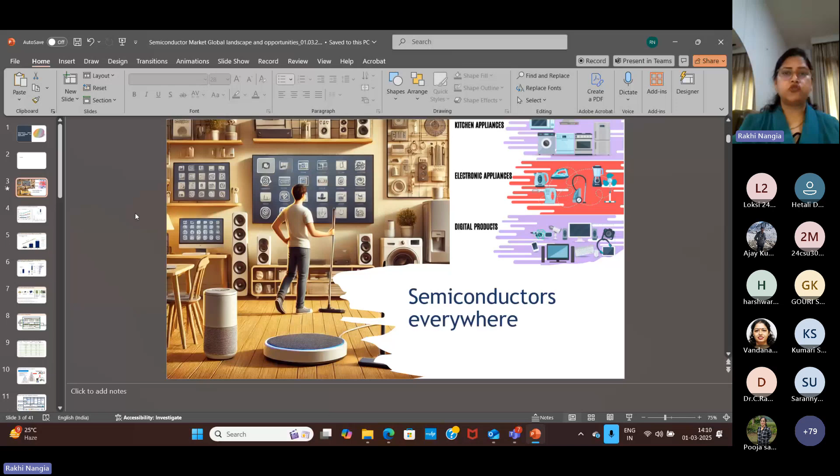In our day-to-day life, there are various appliances, consumer electronics, digital products, and high-tech devices, for example Alexa, consumer electronics like washing machines, smart TVs, smart fridges, and digital products like laptops, desktops, hearables, and wearables. So each and everything means hundreds of electronic devices around ourselves, and inside those consumer devices there are semiconductor chips. Can you imagine how many semiconductor chips we use on a daily basis? I would say in each and every home nowadays there are thousands of semiconductor chips residing, which every person is using, and maybe they are not aware how much electronics they are using, and inside those electronic devices it is nothing but semiconductor chips. That is creating the semiconductor market.

Because those semiconductor devices are going into electronic devices, the final product, that's how it is driving the electronics manufacturing in India.

There are mobile phones, IT hardware like laptop, desktop, tablets, and other devices, very smart devices used in offices and our professional life, various consumer electronic devices like TV, fridge, speakers, and more. Similarly, we are also using auto electronics like various automatic cars, and these things use thousands of semiconductor chips inside.

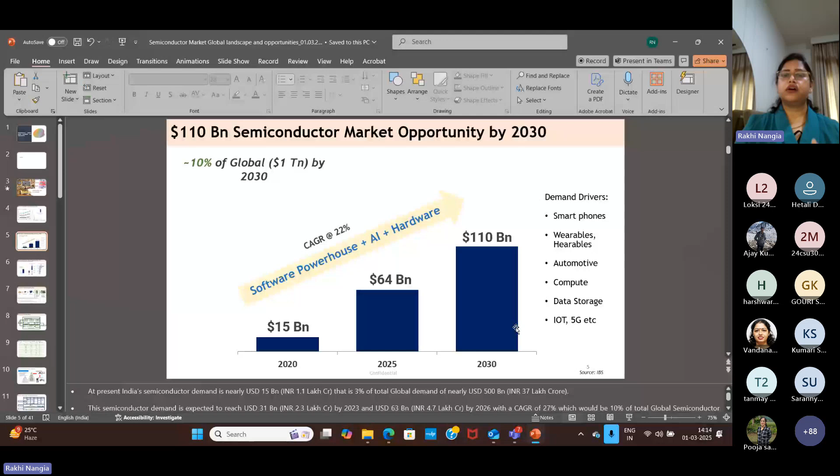As I just mentioned, various demand drivers are definitely electronics, smartphones, wearables, hearables, automotive, compute like AI, data storage, IoT. You can see various modern homes nowadays using a lot of Internet of Things. Every device is connected to the internet and becoming smart on a day-to-day basis. Similarly, 5G communication—each and everything is using semiconductor devices, and that is driving the electronics market.

This is again the bifurcation of the market. I want to show, out of those demand drivers I just mentioned, which are the major ones. If we relate with daily life, mobile phones, hearables, wearables, various IT gadgets like laptop, desktop, mobiles, and 5G networks—these are contributing most of the market.

You can see from this graph that in 2021, the total market was 27 billion dollars, and mobiles and wearables contributed 13.8 billion US dollars, nearly 40 to 50% of the total market. The trend will go on—in 2026, out of nearly 64 billion US dollars, 31.5 billion US dollars is going to be driven by mobiles and wearables, next by IT, then by telecom, and so on.

Inside mobiles and wearables, there are various types of components used in your mobile—there is a processor, memory, various small PCBs used to connect to power and various other connectors, various sensors, and cameras. So these are the market by component.

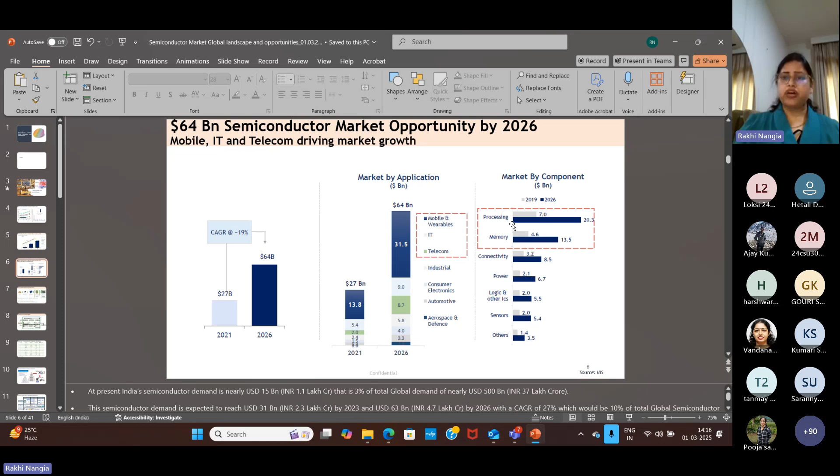Out of the total market, what would be the bifurcation component-wise? This would be not approximate, but the estimated bifurcation of the components market-wise.

So from this slide, I want to show where we are lying. If everyone can relate, as I got to know from Pooja ma'am, most of us are from industry or academia, so everyone can at least relate to these devices and how they are being manufactured.

When we start from simple sand, it is not a very simple process that only sand is going to produce the silicon ingot, but it is a very tedious process. Lots of high purity silica is needed to produce this silicon ingot.

Then this silicon ingot is diced into bare wafers, and these bare wafers are then fabricated in a semiconductor foundry. When this wafer is cut, for example a 200 millimeter or 300 millimeter wafer, it may have 1000 to 2000 chips on a single wafer, depending upon the complexity of the chip and the nanometer technology used.

Whether it is a 3 nanometer chip, a 7 nanometer chip, or maybe a 180 nanometer chip, depending upon the technology, a wafer of 200 to 300 millimeter size may have 1000 or more chips in a single wafer. Then each individual chip is cut from this wafer and packaged.

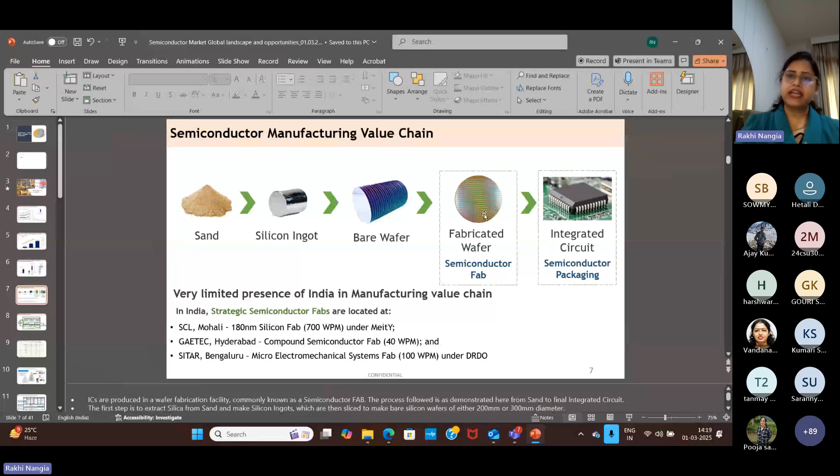But when the chip is being fabricated, the design has to come from somewhere. It is only the manufacturing process in a foundry, but earlier it has to be designed in a design phase. This design phase is usually done by companies we call fabless companies, where chip design is their major focus, then the foundry where fabrication is done, and then the OSAT unit, or assembly, testing, and packaging unit.

So this is the complete supply chain of semiconductor: first the chip will be designed, then the design will be fabricated on a semiconductor wafer, and then that wafer will be cut into various chips, and those chips will be packaged. These are the various allied sectors needed for design.

What do we need? Most of us would know that if I am doing a chip design on a laptop or desktop or in an industry, I need various electronic design automation tools and core IPs. There are various companies like Synopsys, Cadence, Mentor Graphics who design the EDA tools, and those EDA tools are used to design a semiconductor chip in this phase.

Then coming to the fabrication phase, what are the different things required? Number one is raw material - this includes wafers, chemicals and gases, and these are not common chemicals and gases, I will let you know in further slides. The most important thing, which is the most capital intensive, is the semiconductor manufacturing equipment.

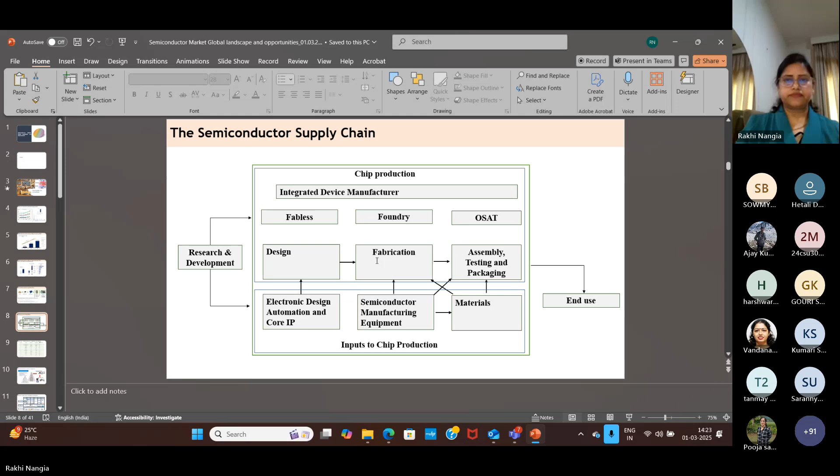But this business model is very important to understand, because, as I mentioned in my previous slide, some companies are only designing, while some are only manufacturing, while some are doing end-to-end process, meaning they are also designing, also manufacturing, also packaging. Those companies are called integrated device manufacturers, so called IDM.

So Intel, Samsung, SK Hynix, Micron, the companies marked IDM mean they are doing their end-to-end process. They are designing their chip, they are manufacturing their chip, and even packaging it, then using it in their own products as well. And some companies are only doing design.

For example, NVIDIA only designs the processor, the GPU processor. Similarly, other companies like MediaTek do the same. And AMD is producing GPU processors, etc. So these are the different models of the companies.

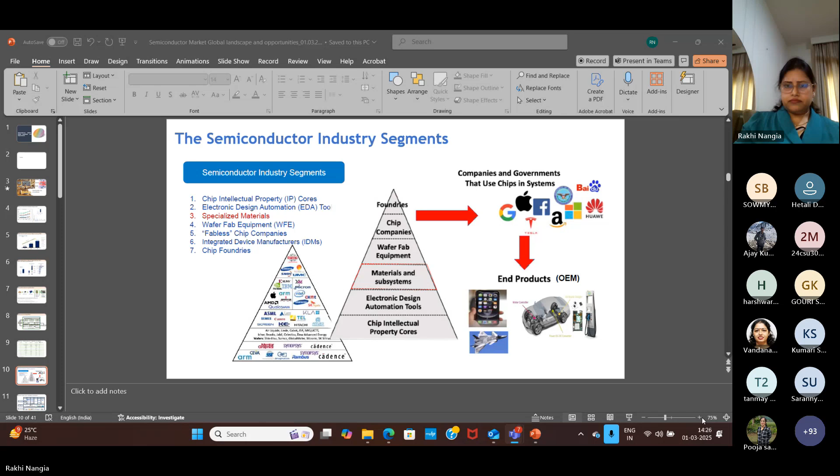So here are, I think, Pooja ma'am, can you see the screen in a proper way? Is the font size okay? Yeah, Rakhi ma'am, it's perfect. Okay, yes, thank you.

From this, I wanted to show that there are various companies present in these domains. A few are producing intellectual property, a few are developing electronic design automation tools, a few companies only work on materials. A few Japanese companies produce raw wafers. A few companies are designing the chips, a few are IDMs, and a few are foundries, meaning they only fabricate, not design, not package. But all of these companies are present globally.

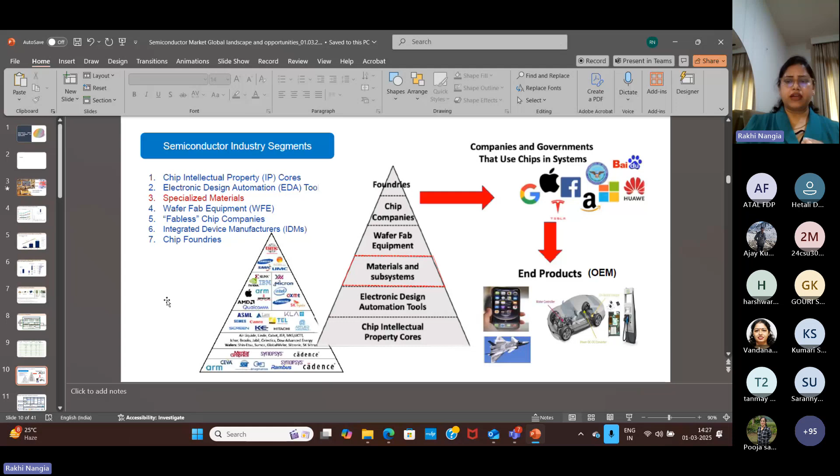There are 6 or 7 major geographies in this space. I will say the US is the major one, then Korea, having SK Hynix and Samsung, then Japan, which has a monopoly in producing wafers, then China, and similarly Malaysia. So there are 6 or 7 geographies majorly contributing to this ecosystem, and India is just entering into the space. So from this, I want to share where we are actually.

So this is the domestic value chain, as I was saying: design, equipment and tools, and manufacturing. So where does India stand in terms of design?

There are various chip design companies in India, but none of them are Indian. They are multinational companies using Indian workforce to develop and design their chips, but the intellectual property remains with the company headquarters only. For example, Intel has its presence in Bangalore, NVIDIA, AMD presence in Bangalore, and some other companies, for example NXP having their presence in Bangalore, in Noida, ST having their presence in various cities of India. We are designing only for these multinational companies, and the intellectual property belongs to that company only, it is not called Indian IP, right?

But the major advantage of working in this domain is that 20% of the chip designers are Indians. So we can say that India knows how to design the chip. In terms of workforce, in terms of knowledge of chip designing, India is contributing 20% of the global manpower. So 20% of the world's design engineers are Indians, whether they are sitting in India or in any other country.

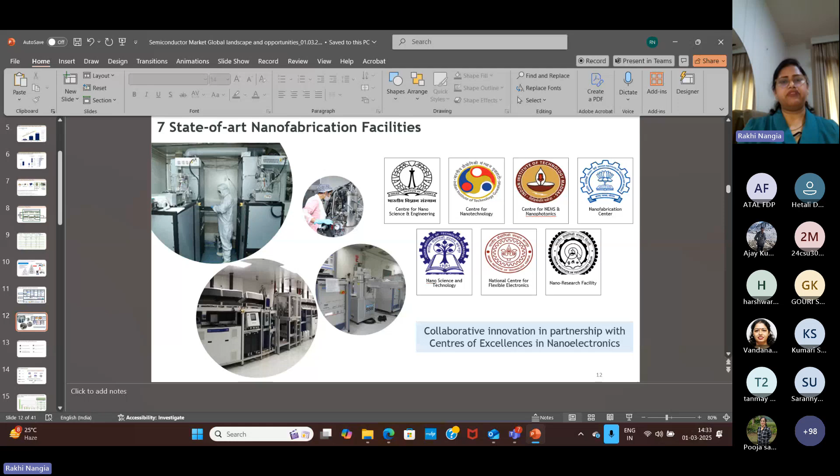And these facilities also have collaboration with their international counterparts, and various kinds of exchange programs - faculty exchange, student exchange, and facility sharing - those things are already going on in these facilities. So all this I am showing from the perspective of what is present in India as of now.

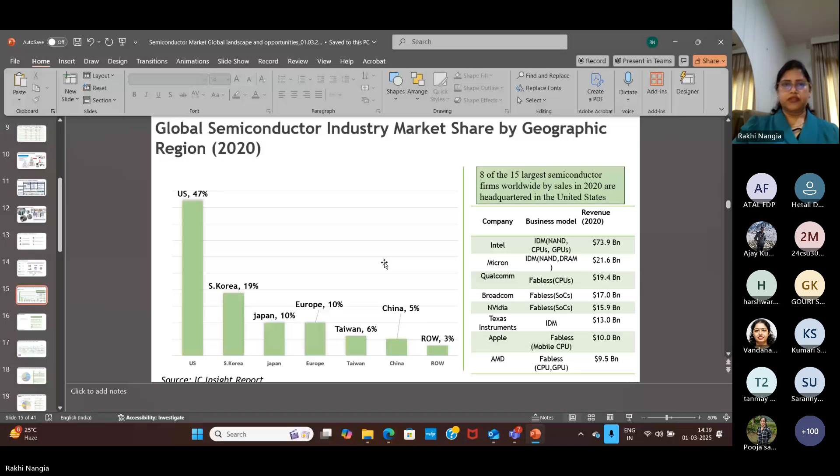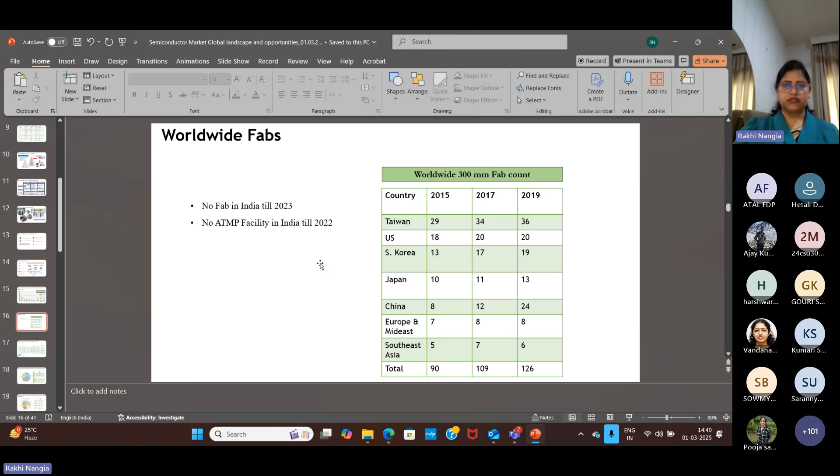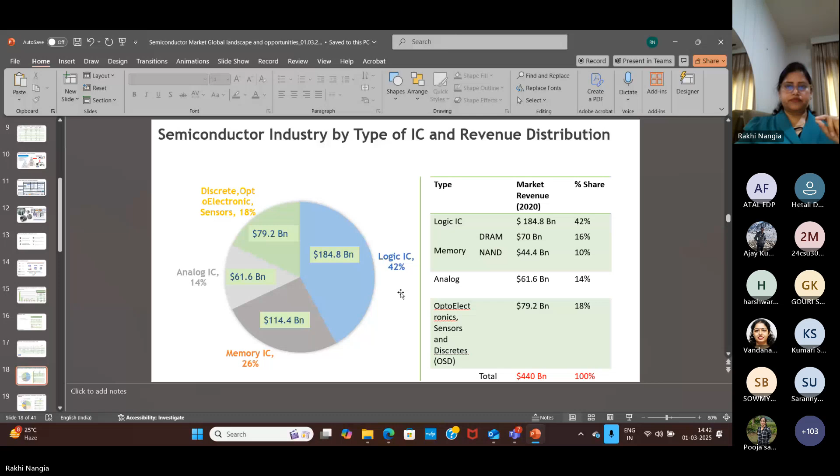I think I have already nearly covered these things, so I will skip this slide.

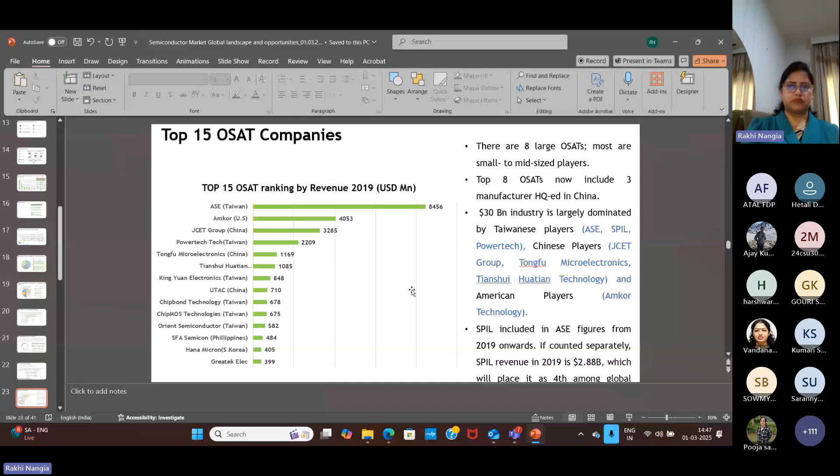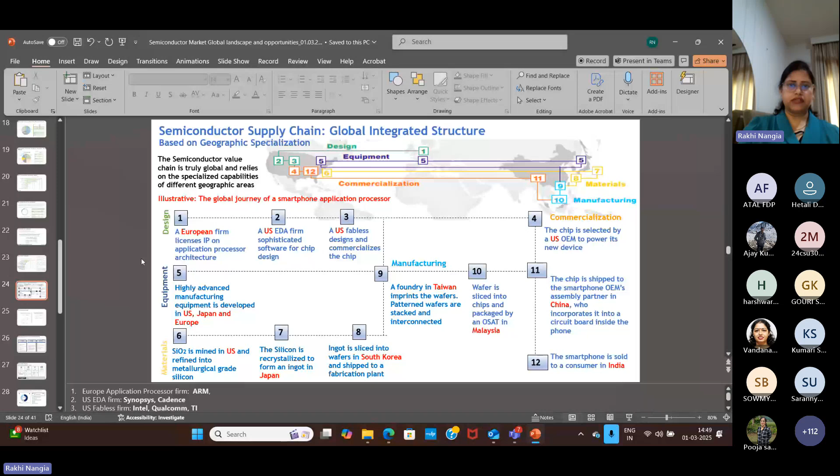Number one is capital intensity. Means to set up a fab, you need billions of US dollars. For example, if India is focusing on 28 nanometers, nearly 2 to 4 US billion is needed to set up that kind of fab. And if TSMC or Samsung, which are focusing on 3 to 5 nanometer technology, are opening up their new fab, for example TSMC has opened up their fab in the US.

Similarly, a US firm is opening its fab in Singapore. But for each individual fab, if they are working on 5 nanometer and below technology, to set up a single semiconductor foundry, more than 10 billion US dollars are required.

So one factor is this. Second is the knowledge, meaning technology know-how. Not everyone can have that technology know-how for this semiconductor space. And third is the workforce, meaning skilled manpower. So these three are the big factors needed to set up a semiconductor manufacturing unit.

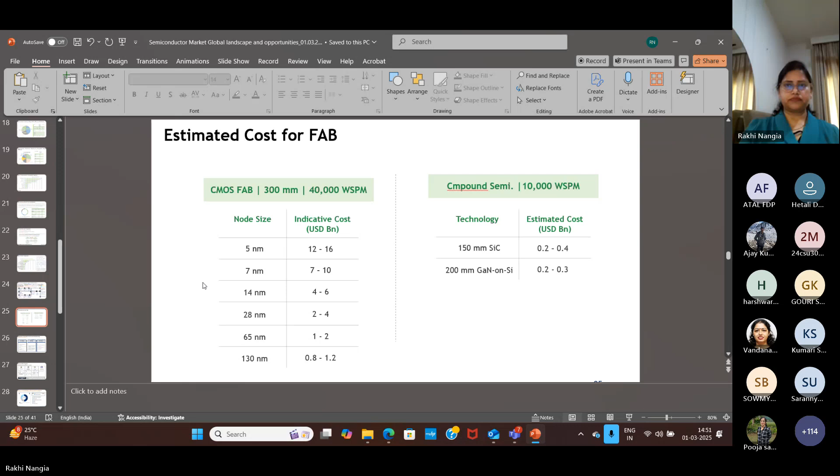Coming to the conclusion, we have seen from the last slides that yes, semiconductor is a very complex and technology intensive process. India has some presence in every space, in design, in manufacturing, in packaging, and globally we have also seen where equipment is, where raw materials are, where design spaces are, and so on. Now, to bridge this gap, the Government of India has come up with a policy to tap this gap and to set up a resilient semiconductor and display manufacturing ecosystem in India.

And they have come up with various policies, not only semiconductor policies but electronics manufacturing policies as well, to support this ecosystem. So I think most of us present here would know that the Government of India has come up with a 10 billion USD policy in December 2021, to set up a semiconductor and display manufacturing ecosystem in India.

So this policy is supporting setting up semiconductor fab, display fab, and compound semiconductor, for example gallium arsenide, gallium nitride, and silicon carbide. So these kinds of fabs, and ATMP packaging units.

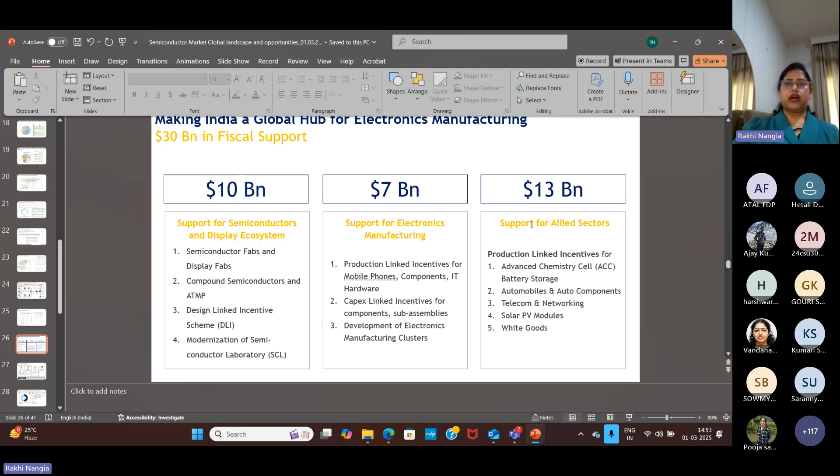And these other policies are various production linked incentive schemes to support allied sectors and to support electronics manufacturing.

So this is the complete Semicon India program. We usually call it the Semicon India program or semiconductor fab policy, either way we can call it. The total outlay approved by the Government of India is 10 billion US dollars. If we convert it into INR, that is 76 to 80,000 crore of rupees.

So for setting up semiconductor and display fab, how much fiscal support is given? Nearly 50% of the total project cost to set up a semiconductor fab will be given by the Government of India on a front or pari passu basis. Similarly, the Government of India also supports investors in terms of infrastructure support, which includes land, water, and power subsidy.

So not only the Government of India, but various state governments as well have come up with their own policies to support the investor companies, giving subsidy on land and water, because this kind of infrastructure is needed to set up a semiconductor fab.

Similarly, for the compound semiconductor and packaging policy, 50% of the capex is being supported, and these are the additional supports that are being given.

Similarly, for semiconductor design, this is the design-linked incentive scheme. This scheme is supporting 100 startups. The design infrastructure support, like EDA tool support, will be given, meaning 50% of the subsidy will be given by the Government of India. Similarly, on sales as well, we call it deployment-linked incentive. So 4 to 6% of the net sales, meaning incentive on sales, will also be given by the Government of India, along with design infrastructure support in terms of EDA tools.

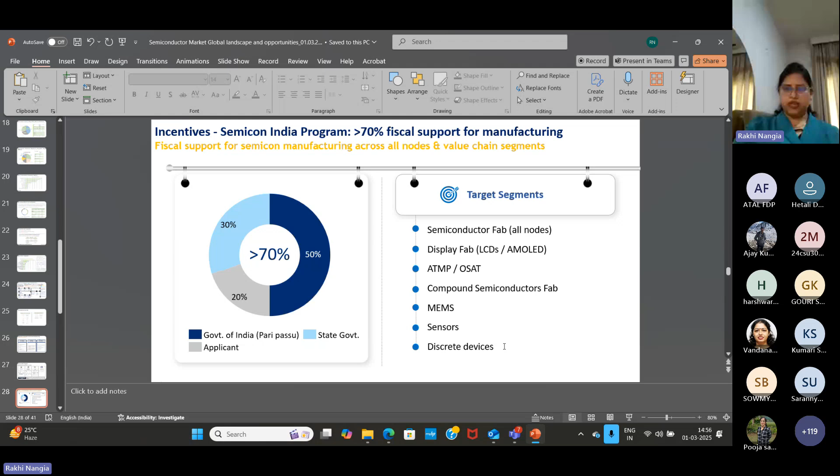Design-linked incentive scheme, I already mentioned. So these are the various target segments that are being covered. If any startup or design company working on integrated circuits, chipsets, system on chips, systems and IP cores, or semiconductor linked design, they would be supported by the Government of India in terms of product design, with 50% of the support given.

In terms of deployment, meaning if some company develops an IP and it is deployed somewhere, with some other company taking that IP and using it in its product, then on that sale, the Government of India will give 4 to 6% incentive and infrastructure support.

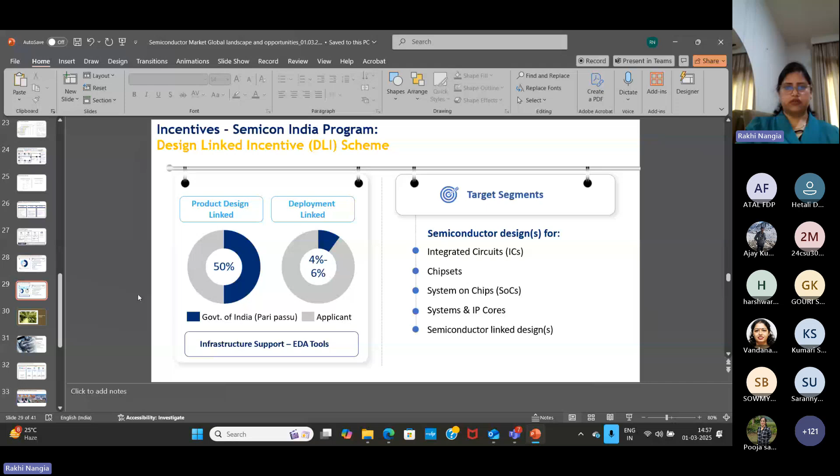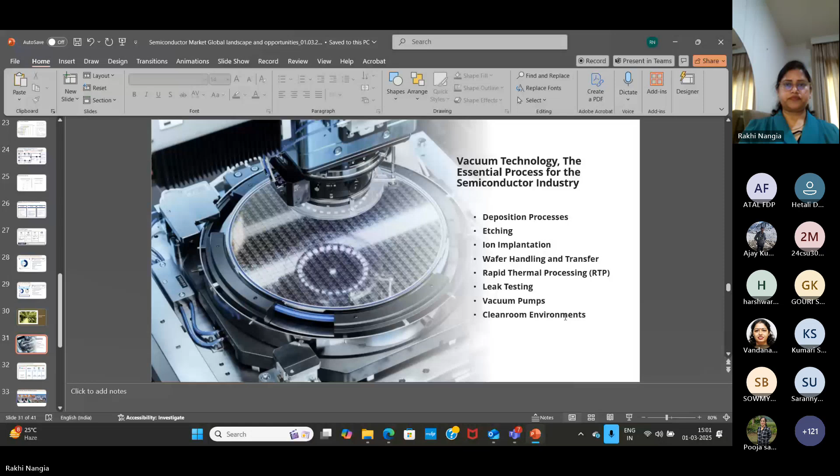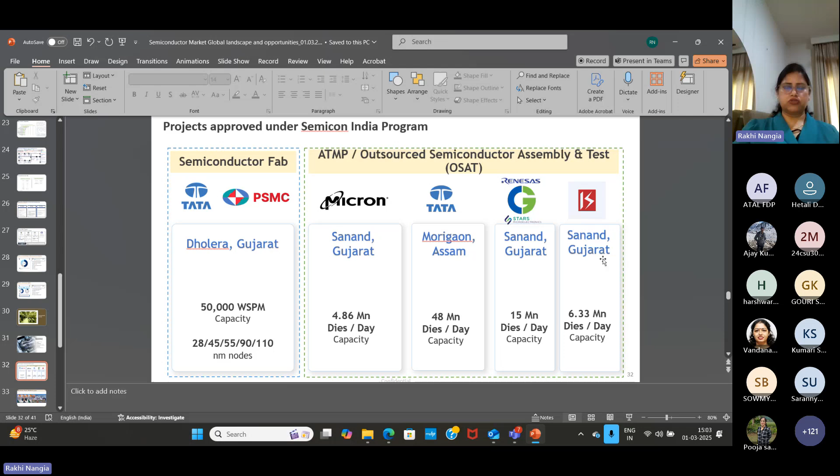Another is again by Tata—they are setting up their unit in Morigaon, Assam, and will produce 48 million dies per day capacity. Similarly, there is another company called CG Power, who have tied up with Renesas and Stars Microelectronics for technology, and they will produce 15 million dies per day. So these 4 are packaging units, and one is the semiconductor fab. The last one is Kaynes Technology, setting up their unit in Sanand, Gujarat.

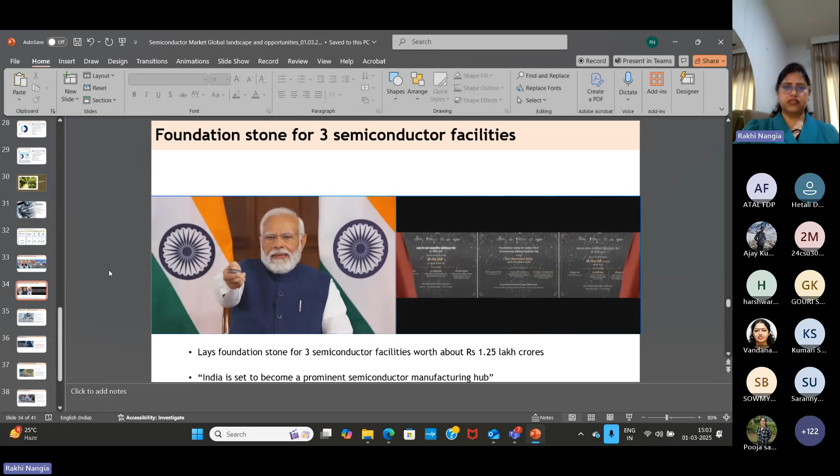So these are the pictures of when the Honorable PM broke the stone and launched these new 5 units—the foundation stone of 3 semiconductor facilities with lots of investment.

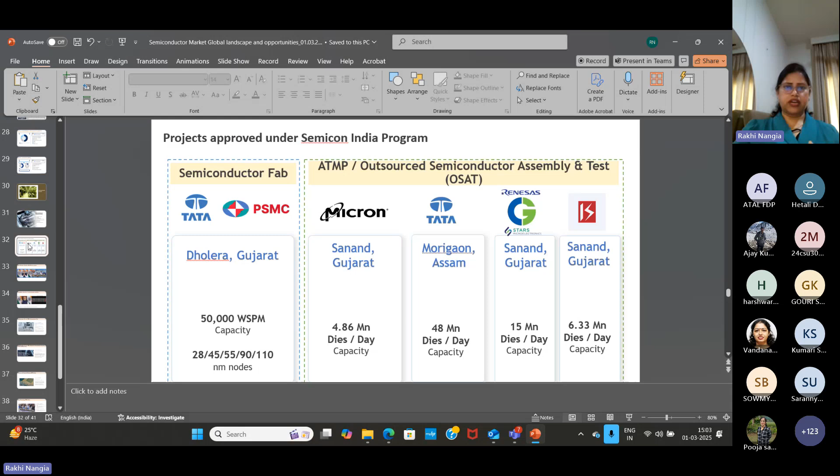So these are the details of these units, like Tata Electronics Private Limited. They are setting up in Dholera, Gujarat with this much capacity, approved in 2024. They are setting up a semiconductor fab facility with an investment of 91,000 crore, in collaboration and partnership with Powerchip Semiconductor Manufacturing Corporation, PSMC, Taiwan. They will produce nearly 50,000 wafer starts per month across various technology nodes, from 28 nanometer to 110 nanometer nodes—depending upon the type of chip, the technology node will vary. They are developing their facility in Dholera, a special investment region in Gujarat.

Another facility is in Morigaon, Assam. There's a strategic reason behind this choice of Assam instead of Gujarat, because various clusters are being driven for infrastructure development around the country.

There are various strategic reasons behind this. Tata is again setting up their facility, but this one would be a packaging facility, with an investment of nearly 27,000 crore.

Yes, and they will use their indigenous technology, meaning they have not tied up or partnered with anyone else for this. They will use their own technology to package these chips, using various packaging techniques like wire bond technique, flip chip technique, integrated system design, and system packaging technique. These are the various packaging technologies, though there are others as well.

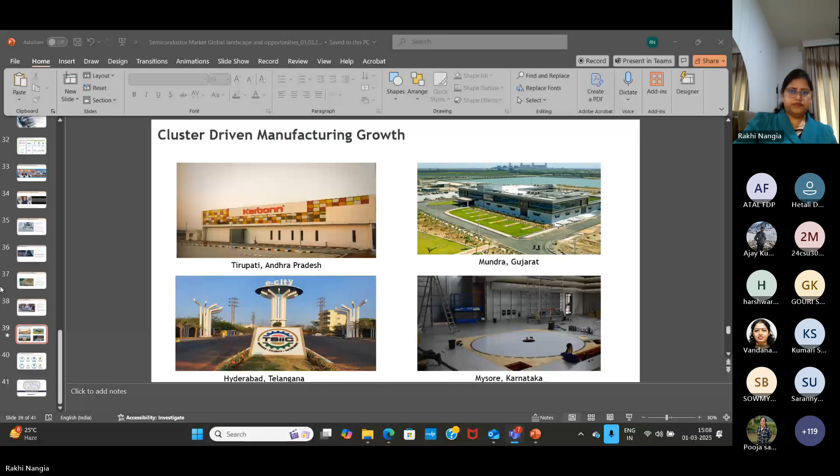So out of those four major factors, investment is being taken care of, infrastructure is being taken care of, and workforce development is being taken care of. But yes, there are lots of gaps, and here is the role of academia and research institutes.

I will end my session here. So, how can we go forward in this space?

Maybe if you are a student, definitely join an institute, university, or college offering semiconductor programs in terms of design, manufacturing or foundry, and semiconductor packaging. Or if you are a pass-out student, you can join various courses at different training institutes. There are lots of programs going on in India, and I know various institutes offering exactly the same program that the industry needs for manpower.

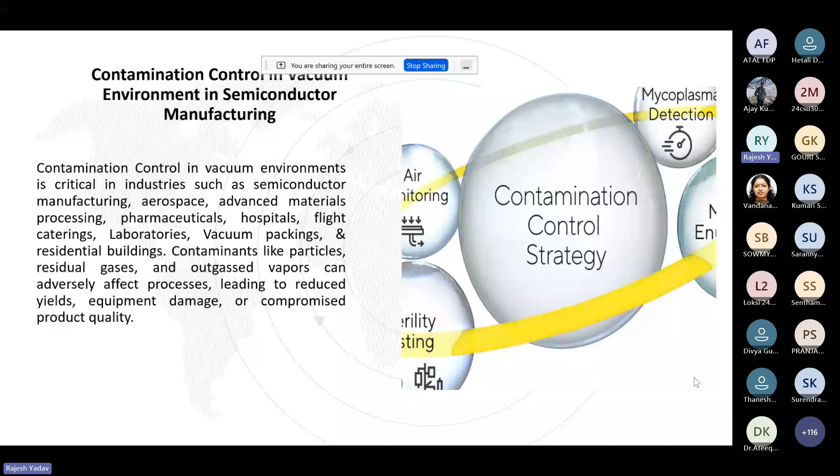The sources of contamination basically are the particulate matters in the vacuum environment, molecular contamination, process generated contaminants, operator induced contaminants, the pumping system, human factors responsible for contamination in vacuum environment, and environmental dust. We'll discuss them one by one in detail.

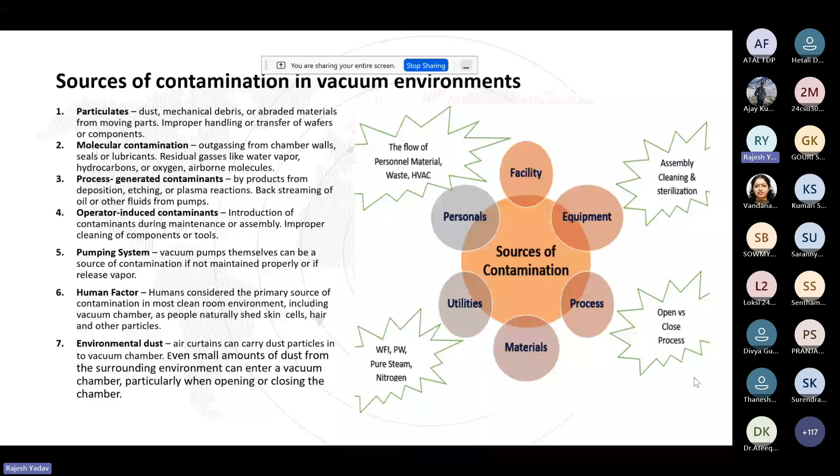The source of contamination is basically human and process both. The particulate matters - surfaces of semiconductors are particularly vulnerable to contamination like dust, oil, mechanical debris, or abraded material from moving parts. This accumulation on the surface can create barriers or insulating layers that interfere with the electrical circuit. Also improper handling or transfer of wafers or components.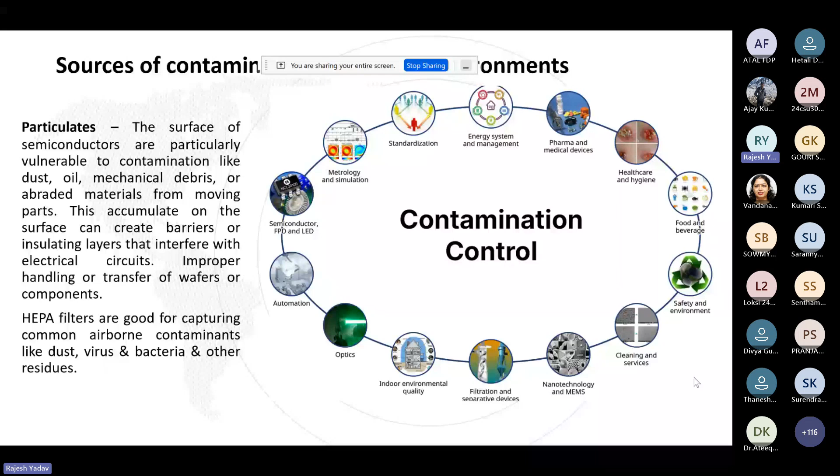Molecular contamination is basically airborne - outgassing from chamber walls, seals, and lubricants. Residual gases like water vapor, hydrocarbons, oxygen, and airborne molecules, often called AMCs, which can negatively affect the quality of manufactured wafers by introducing defects during vacuum-based processing steps, even at extremely low concentration, due to their potential to react with the wafer surface and disrupt the desired material properties.

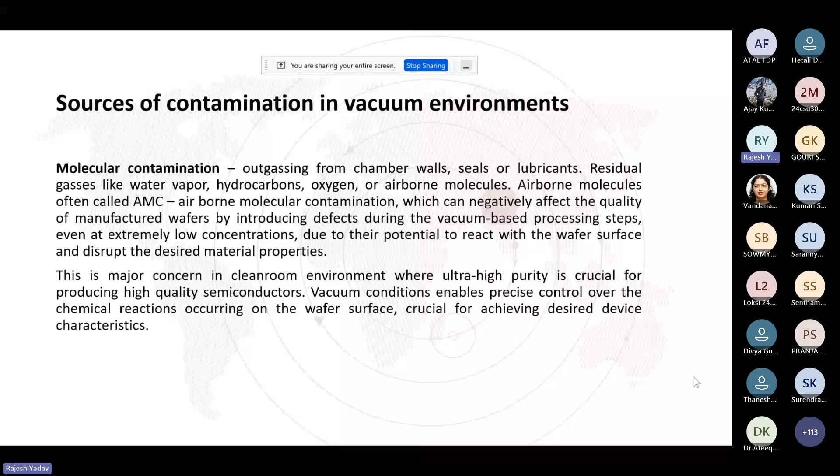This is a major concern in the clean room environment where ultra-high purity is crucial for producing high-quality semiconductors. Vacuum conditions enable precise control over the chemical reactions occurring on the wafer surface, crucial for achieving desired device characteristics.

Sources of the contamination in vacuum environment - molecular contamination key points include impact on quality, sources of airborne molecular contamination like operators, chemicals used in the process, equipment outgassing, and surrounding environments. Common airborne molecular contamination types are ammonia, water vapor, organic compounds, and various other reactive molecules.

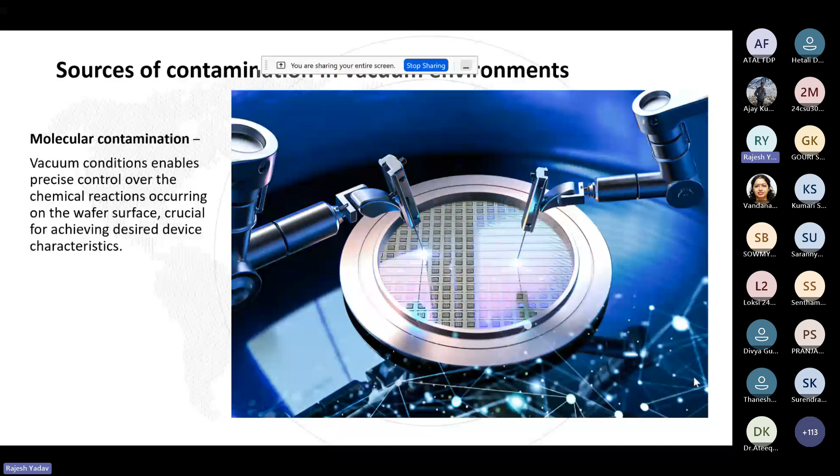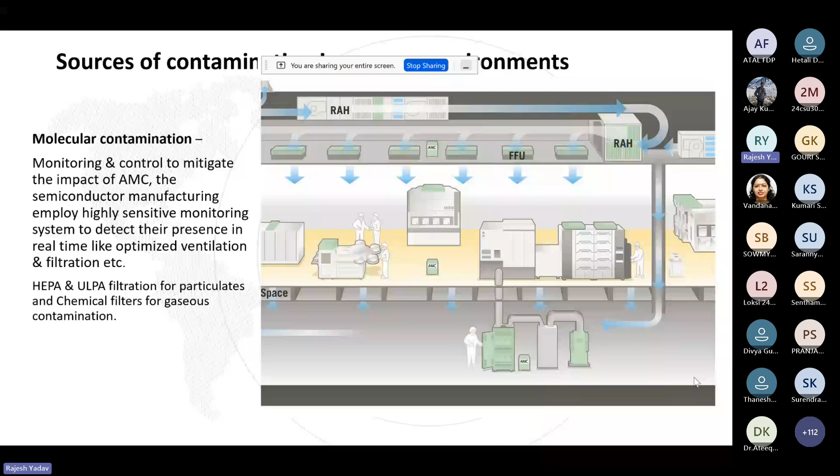Vacuum conditions enable precise control over the chemical reactions occurring on the wafer surface, crucial for achieving desired device characteristics. This is a sample of how air circulates in a clean room - the return air as well as the conditioned air, because air change is required to maintain healthy indoor air quality. Return air mixes with conditioned air, and fresh air also mixes at the plenum chamber. This FFU is the fan filter unit, which I will discuss in upcoming slides in detail.

This is a sample where outside air is treated first before mixing into the clean room with the clean room air. Vacuum conditions enable precise control over chemical reactions occurring on the wafer surface, crucial for achieving desired device characteristics. Filtration basically has two steps - HEPA filtration and ULPA filtration - the high efficiency particulate air filter and the ultra low penetrating air filter.

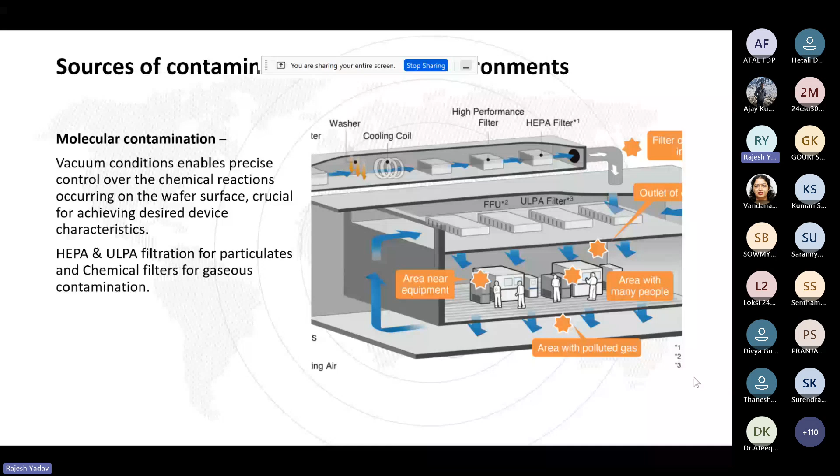The vacuum system utilizes high performance pumps to create a low pressure environment which draws air and contaminants through the filtration system. The HEPA and ULPA filters remove even submicron particles. The chemical filters are designed to absorb and remove specific chemical vapors and gases, often using activated carbon or other specialized media depending upon the chemical present in the process.

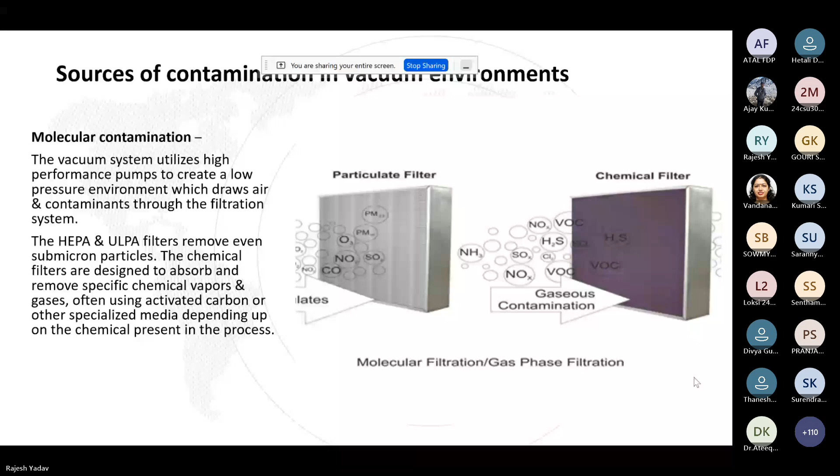This is in detail how the HEPA filter, the ULPA filter, and the chemical filtration remove all the microorganisms from the clean room air.

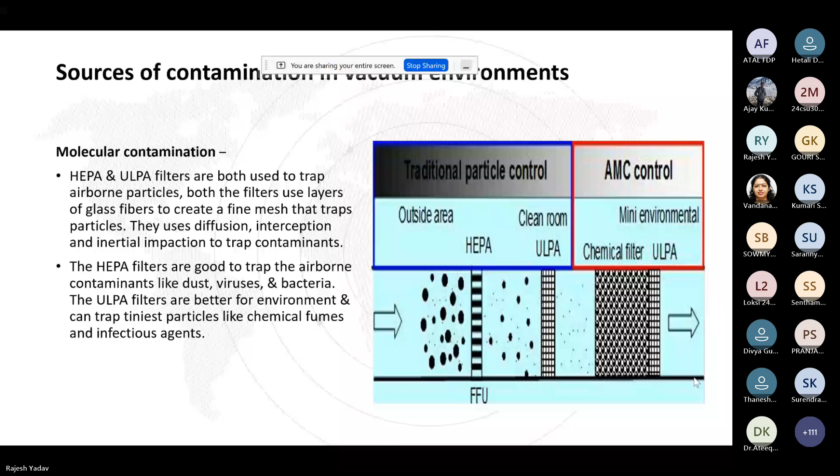This figure is in detail. The ambient air is introduced into the clean room after pre-treatment. There is a pre-filtration, there is an air washer. The air washer absorbs the particulate matters, and then the air goes to the cooling coil. The cooling coil removes the water vapors, which is below the dew point. Then there's a multiple stage high performance filtration system, which mixes with the conditioned return air, the ULPA filtration system, and that's how it maintains the quality in the clean room.

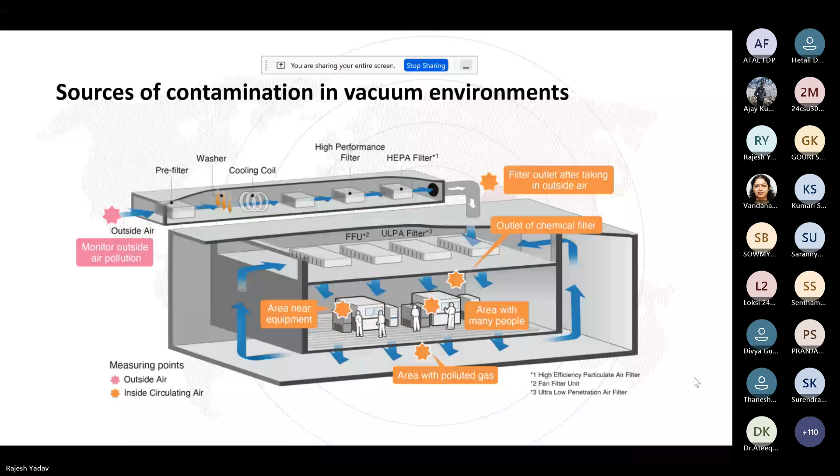The sources of contamination: process generated contaminants, the byproduct of deposition, etching, or plasma reactions, and back streaming of oil and other fluids from pumps. Semiconductors are extremely sensitive to even minute amounts of contaminants, which affect the performance of the device.

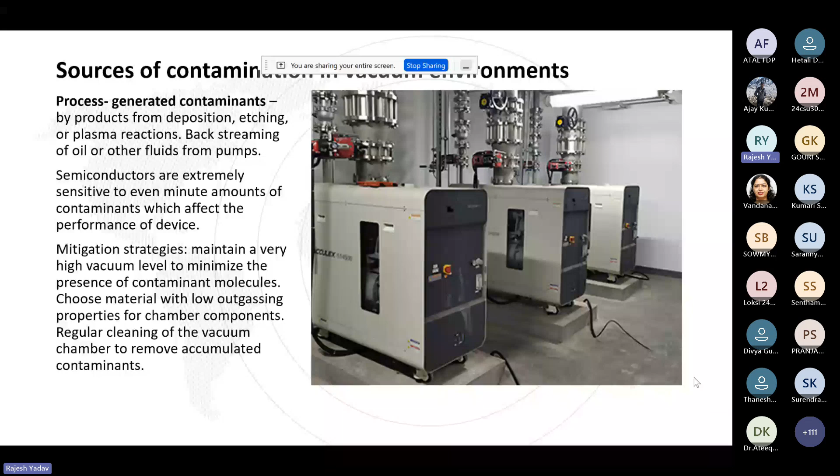Mitigation strategies mainly are to maintain a very high level of vacuum to minimize the presence of contaminant molecules, choose materials with low outgassing properties for chamber components, and regular cleaning of the vacuum chamber to remove accumulated contaminants.

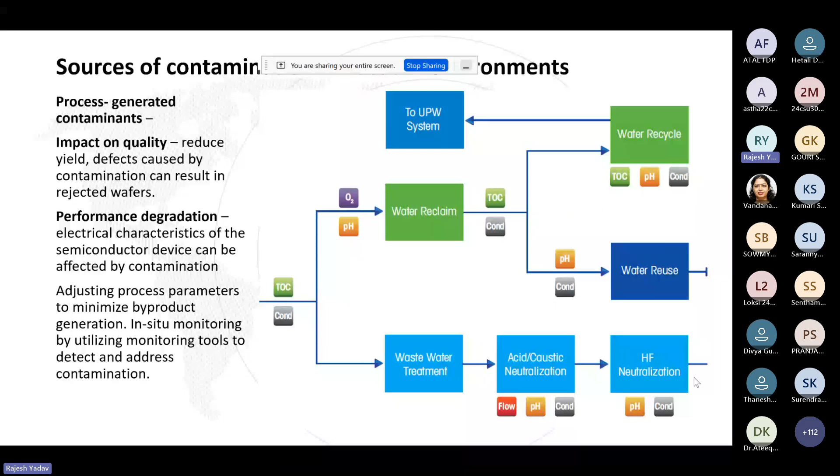Process-generated contaminants: the sources are chemical reactions during the process like CVD, where unwanted byproducts from chemical reactions can be produced and deposited on the wafers. Outgassing from materials—the chamber wall, seals, and other components can release adsorbed gases into the vacuum, contaminating the process. Particles generated by physical processes like sputtering and etching can settle on the wafers. Improper handling of wafers or materials within the vacuum chamber can also introduce contamination.

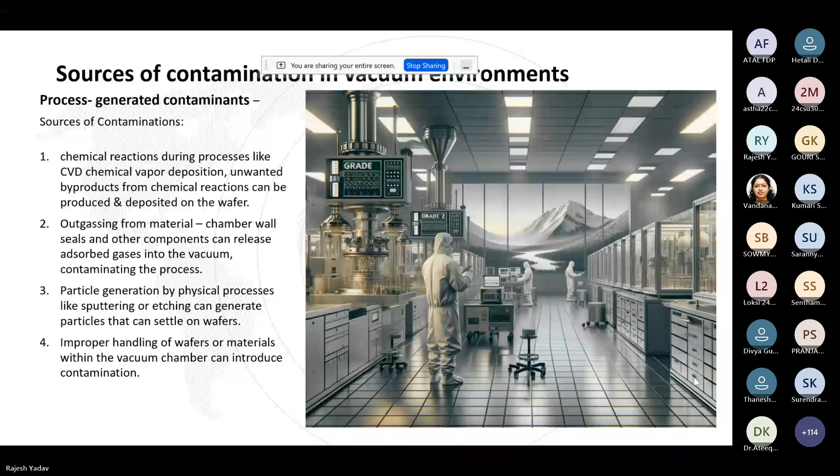Next is operator-induced contamination. Even with strict clean room protocol, operators can shed microscopic particles from their skin, clothing, hair, even their breath, which can settle on the wafer during handling.

These contaminants can disrupt the electrical properties of the semiconductor, leading to defects, reduced yield, and potential device short circuits—even while wearing protective gear—potentially impacting the quality and functionality of the semiconductor device due to the sensitive nature of the production process. This is minimized by proper clean room attire, strict procedures, monitoring, and training.

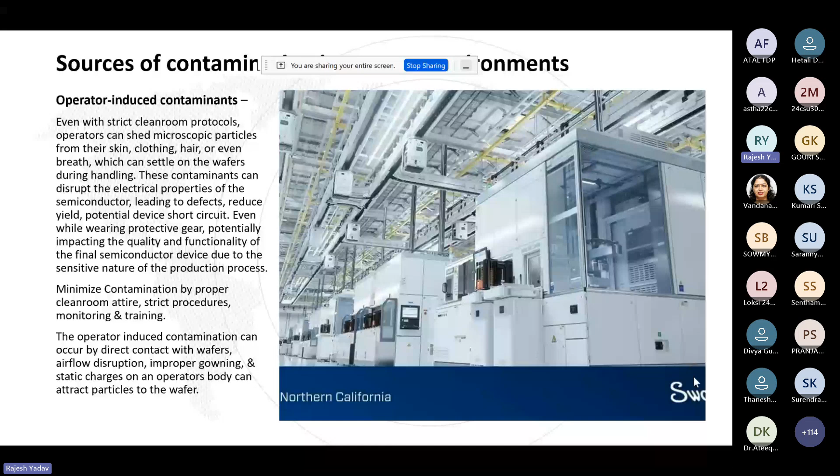The introduction of contamination can occur by direct contact with the wafer, airflow disruption, improper gowning, and static charges on an operator's body, which can attract particles onto the wafers.

Basically, there are... I'll just go to the next one.

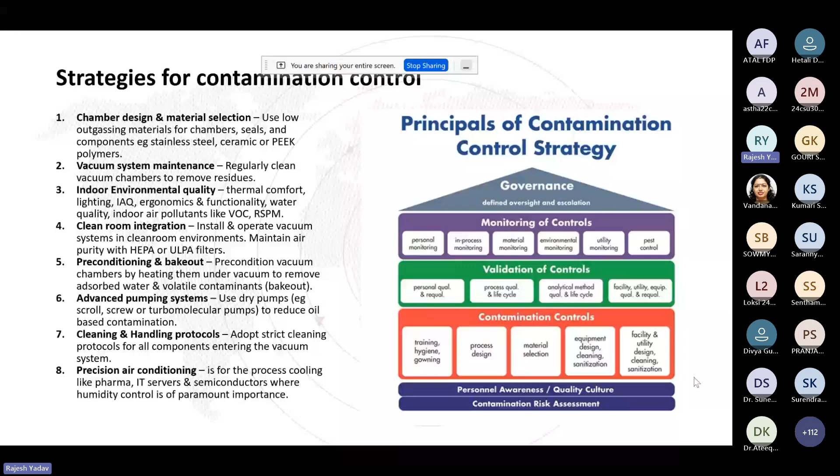Chamber design and material selection: use low outgassing materials for chambers, seals, and components—for example, stainless steel, ceramic, or PEEK polymers. Minimize sharp edges or complex geometries where particles can accumulate, and design vacuum pumps and systems to avoid backstreaming or oil migration.

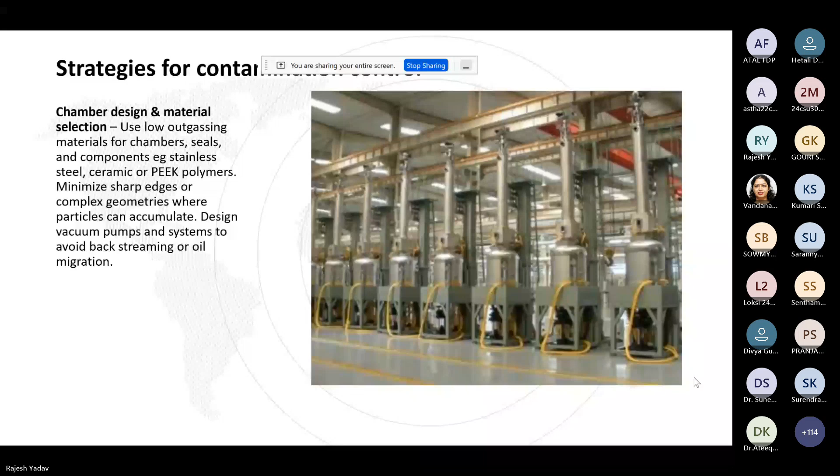Vacuum system maintenance is very important to maintain the health of the vacuum pumps. Regularly clean the vacuum chambers to remove residues, replace worn seals, gaskets, and O-rings with high purity, low outgassing alternatives, and service vacuum pumps to ensure proper operation and prevent backstreaming.

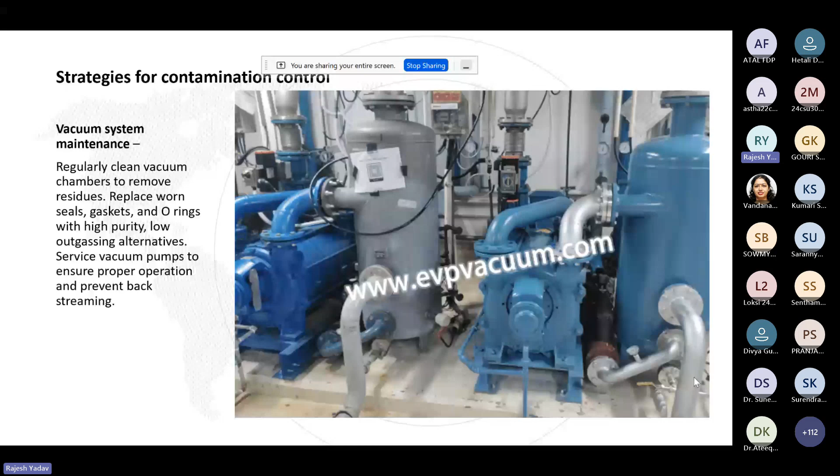Indoor environmental quality is very important. This includes thermal comfort—temperature, airflow, and humidity—lighting, indoor air pollutants like volatile organic compounds, respirable suspended particulate matter, water quality, odor, indoor air quality, chemical emission control, and cleanliness. This is achieved by a highly specialized HVAC system with advanced filtration and monitoring systems.

The PMS, particulate matters measuring systems, are various devices fixed in the clean room where semiconductors are manufactured: real-time air monitoring where wafers are exposed, vacuum motor clean room air, the liquid particle counter, air monitoring in the lithography area, DI water plants, deionization water plants, and gas monitoring devices. These devices are placed at various locations to monitor indoor air quality.

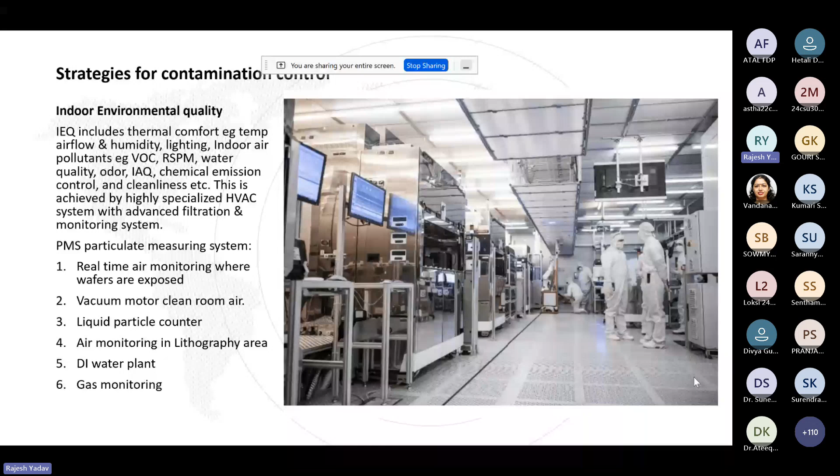The clean room integration: install and operate a vacuum system in a clean room environment, maintain air purity with HEPA and ultra-low penetration air filters, and use a laminar flow hood or enclosure for handling sensitive components.

These are the type of pollutants: toxic gases, combustible gases, organic solvents, acid and alkalis. These are byproducts of the process of manufacturing semiconductors.

Strategies for contamination: preconditioning and bake out. Precondition the vacuum chambers by heating them under vacuum to remove adsorbed water and volatile contaminants. Bakeouts degas components and materials before introducing them into a vacuum environment.

The basic steps are moisture absorption and saturation, steam formation during solder reflow, pressure buildup, crack propagation, and delamination and failures.

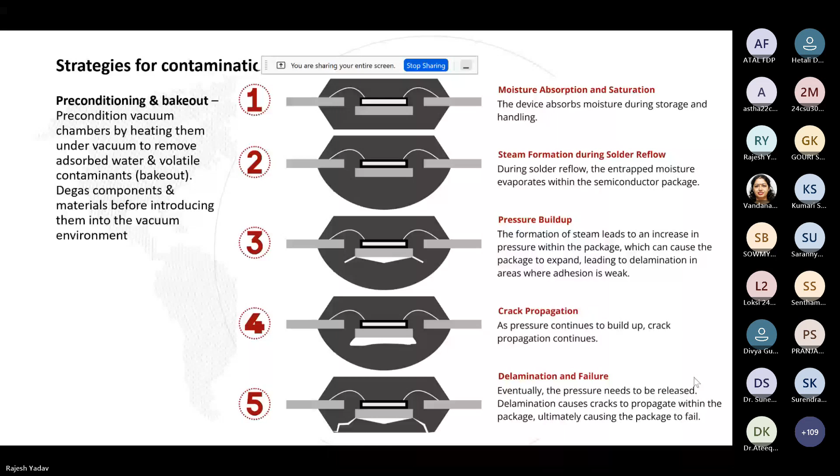Advanced pumping system: use dry pumps. Basically, semiconductor manufacturing units use dry pumps, which are scroll type or screw type, or turbomolecular pumps, to reduce oil-based contamination. Install cryogenic or getter pumps to capture residual gases.

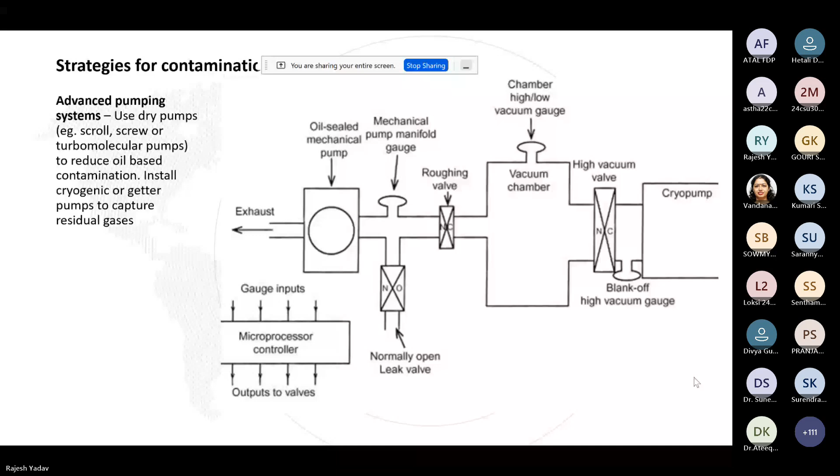Strategies for contamination control: cleaning and handling protocols. Adopt strict cleaning protocols for all components entering the vacuum system. Use tools and equipment designed to minimize particle shedding. Implement anti-static measures to prevent electrostatic attraction of particles. Specific cleaning challenges include submicron particles, metal ion contamination, organic residues, and electrostatic discharge.

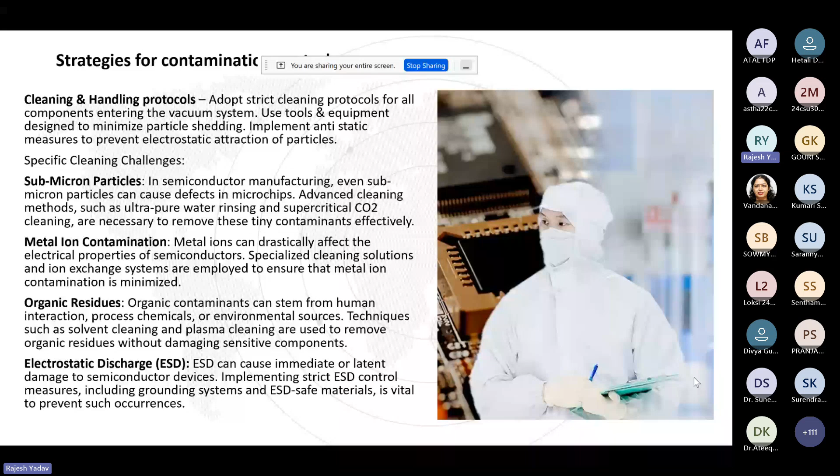These are some of the strategies of contamination control in the clean room.

Strategies: precision air conditioning is for process cooling like pharma, IT server, and semiconductor, where humidity control is of paramount importance. Precision air conditioning is used in semiconductor manufacturing to control temperature and humidity levels.

This helps maintain the strict environmental conditions needed to produce high quality products. It can maintain a specific operating environment with constant temperature and humidity, controlling temperature difference within 0.1 degrees Celsius or even higher. This controls humidity, maintains temperature, minimizes defects, and ensures consistent product quality.

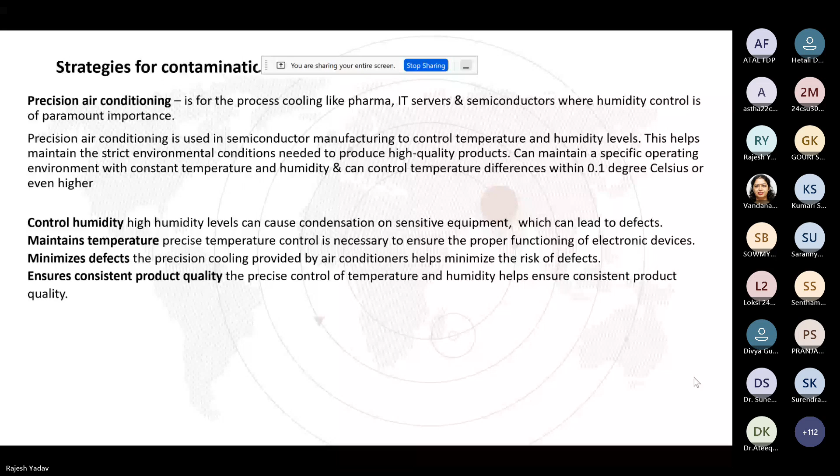Best practices: component preparation, assembly protocol, operational practices, process optimization. Process optimization optimizes parameters like temperature, pressure, and gas flow to minimize contamination byproducts.

There are 10 ways to prevent cross contamination in the clean room: clean surfaces regularly, introduce hand sanitizers, create a cleaning schedule, wear appropriate personal protective equipment, dispose of material correctly, use products in plastic-free packaging, assign items for certain jobs, store items separately, and use correct cleaning equipment.

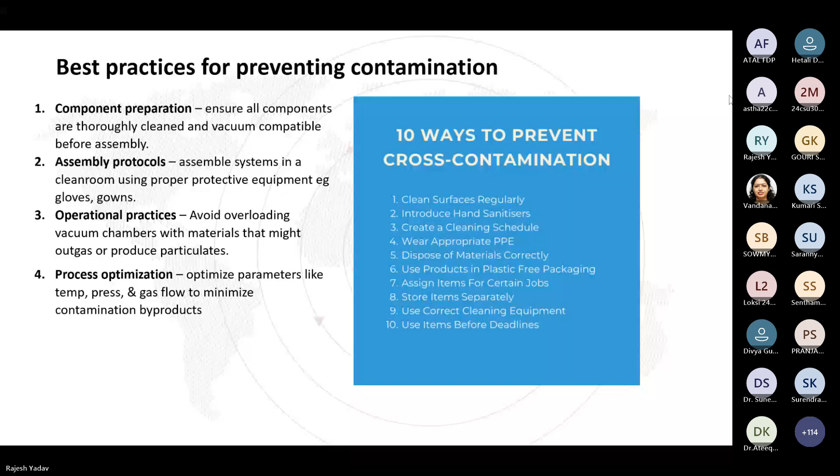These were some of the steps to prevent cross-contamination. Component preparation: ensure all components are thoroughly cleaned and vacuum compatible before assembly.

The initial step of creating the building block for a semiconductor device is preparing a silicon wafer with a smooth surface, often involving processes like silicon wafer lapping, polishing, and cleaning, which set the foundation for further patterning and deposition of various material layers to form the desired circuit components.

Best practices for preventing contamination: the key aspects of component preparation are wafer fabrication, cleaning, oxidation, photolithography, etching, deposition, and ion implantation.

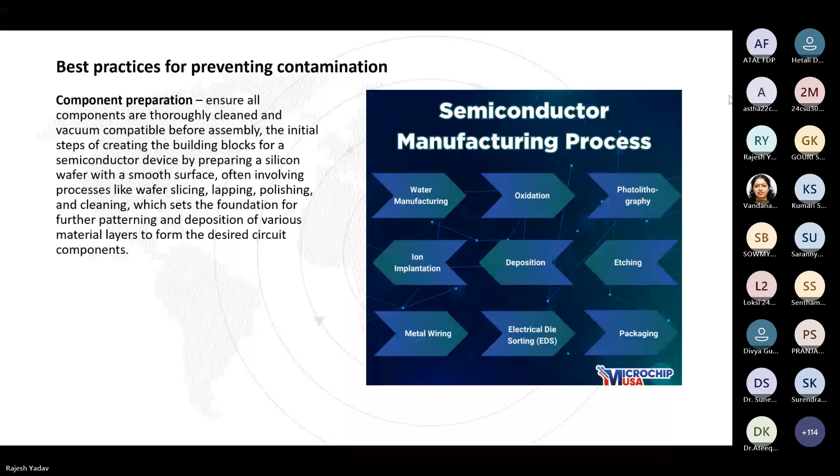Assembly protocol: work in a clean room using proper protective equipment, for example gloves and gowns, with strict access control, regular cleaning and maintenance of equipment, advanced air filtration systems, monitoring air quality and particulate matter counts, and adhering to strict protocols for handling vapors and chemicals throughout the manufacturing process, for contamination prevention in the clean room.

Some steps: positive pressure to push away airborne particles, high efficiency particulate air filtration to remove contaminants, temperature and humidity control, and access control protocols.

The assembly protocol: clean room with strict access control and proper gowning, monitoring and quality control like particle counters to identify air quality contamination issues, surface analysis to detect potential contaminants on wafers, gowning practices like full body suits, gloves and face masks, and regular gowning checks.

The wafer handling protocol is to minimize exposure, limiting wafer exposure to air and handling only in designated areas. Chemical procedures: strict protocols for handling chemicals to prevent spills and vapors.

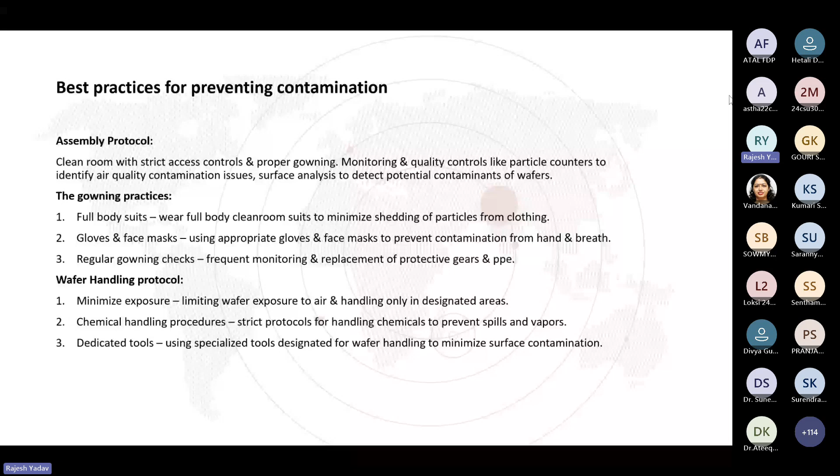Dedicated tools: using specialized tools designated for wafer handling to minimize surface contamination. The best practices for preventing contamination involve operational practices, such as avoiding overloading of the vacuum chamber with materials that might outgas or produce particulates.

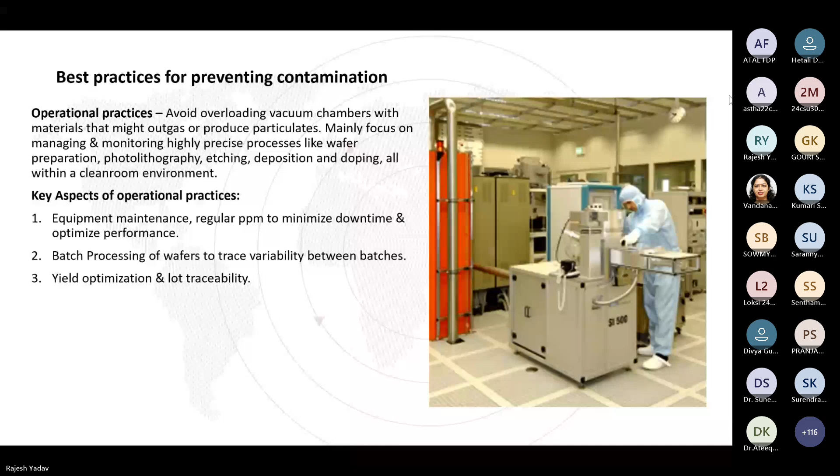Mainly focus on managing and monitoring highly precise processes like wafer preparation, photolithography, etching, deposition, and doping, all within the clean room environment. The key aspects are equipment maintenance, regular PPM to minimize downtime and optimize performance, and batch processing of wafers to trace variability between batches, yield optimization, and lot traceability.

Optimize parameters like temperature, pressure, and gas flow to minimize contamination byproducts. Process control of temperature, humidity, pressure, and chemical concentration using advanced sensors. This is the practice of analyzing and adjusting various parameters within the production process to minimize yield, efficiency, and quality losses by minimizing variations.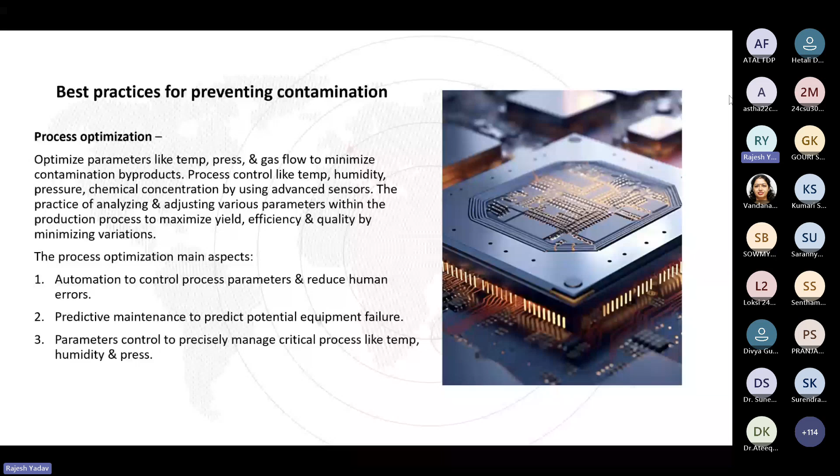The process of optimization has main aspects: automation of control process parameters to reduce human errors, predictive maintenance to predict potential equipment failure, and parameter control to precisely manage critical processes like temperature, humidity, and pressure.

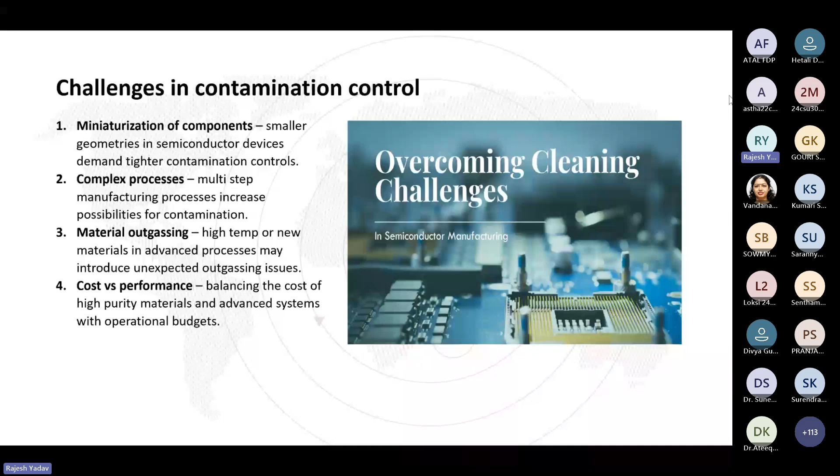The challenges in contamination control are miniaturization of components, complex processes, material outgassing, and cost versus performance. The complex, multi-step manufacturing process increases the possibility of contamination.

The disposal of semiconductors also has an adverse impact on the environment, causing groundwater and air pollution and generating toxic wastes. So water treatment is applied once the water is used in semiconductor manufacturing; the water is treated through the process.

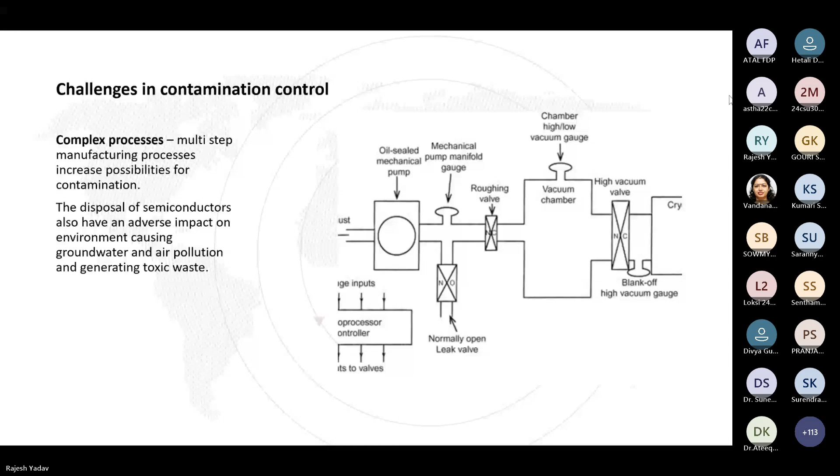Material outgassing: high temperature or new materials in advanced processing may introduce unexpected outgassing issues, potentially contaminating the wafer and impacting device performance. This is a critical concern in creating a clean room environment due to the need for extremely high purity levels. The common sources of outgassing are polymers, plastics used in packing, the wafer carrier, or photoresist, which can release VOCs, adhesives, and cleaning chemicals.

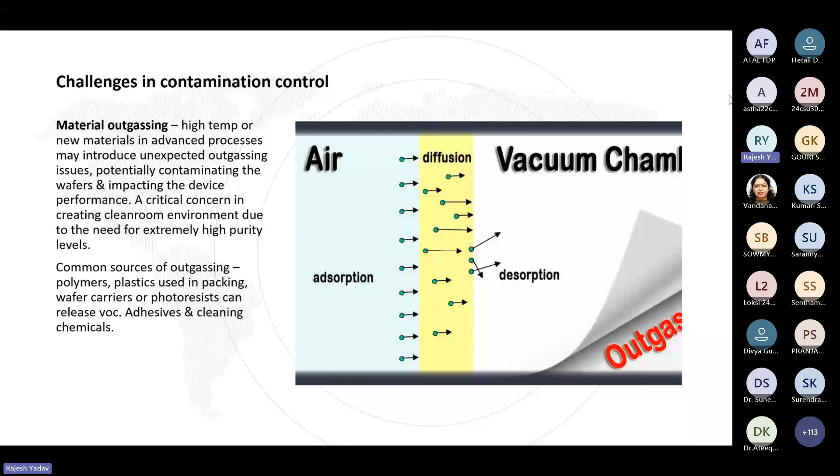Cost versus performance: balancing the cost of high purity materials and advanced systems with operational budgets, and the cost of producing a chip relative to the resulting performance capabilities. Achieving higher performance often requires more advanced and costly manufacturing techniques, materials, and equipment.

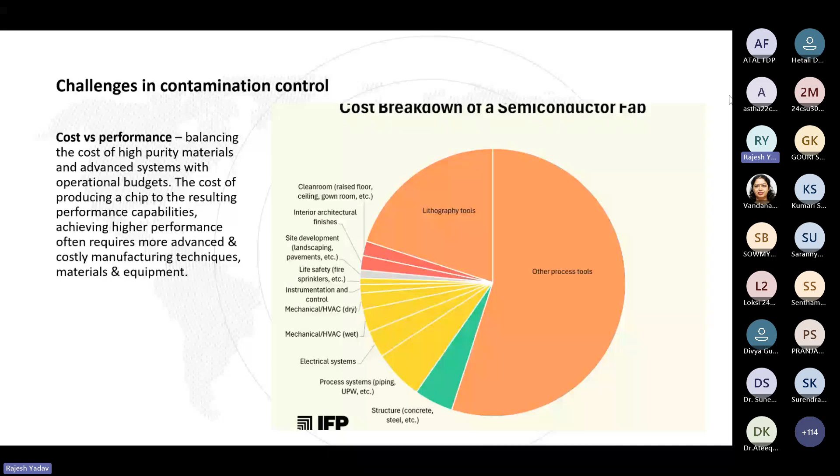Miniaturization of components: the main features are clean room environment, ultra pure chemicals and water, filtration systems for air, gas and liquid, and surface treatment cleaning to minimize wafer surface contamination.

The main challenges in semiconductor contamination control are diverse contamination sources, for example human hair, skin flakes, clothes, chemicals, airborne particles, and equipment wear and tear. Detection limitations require sophisticated monitoring and detection systems. Cleaning challenges: cleaning without contamination is a complex issue.

Preventing internal contamination from spreading to the outside environment, and implementing and maintaining a robust contamination control program can be expensive. Operator training is needed to minimize operator-induced contamination. The size of semiconductors is becoming smaller, making contamination control increasingly difficult.

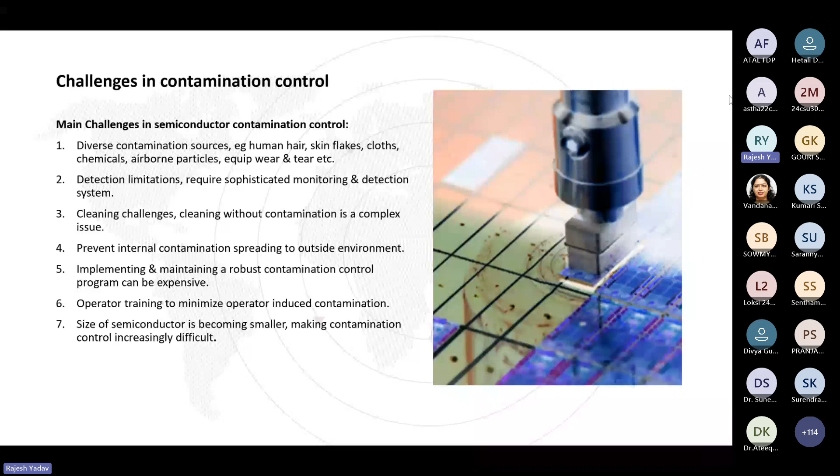Self-cleaning chambers use coatings or technologies to reduce the adhesion of contaminants, as automated units that clean non-volatile material deposits. These self-contained units have integrated in-situ cleaning technologies and can be programmed to perform each process step used for non-volatile material deposits, with integrated exhaust gas treatment units.

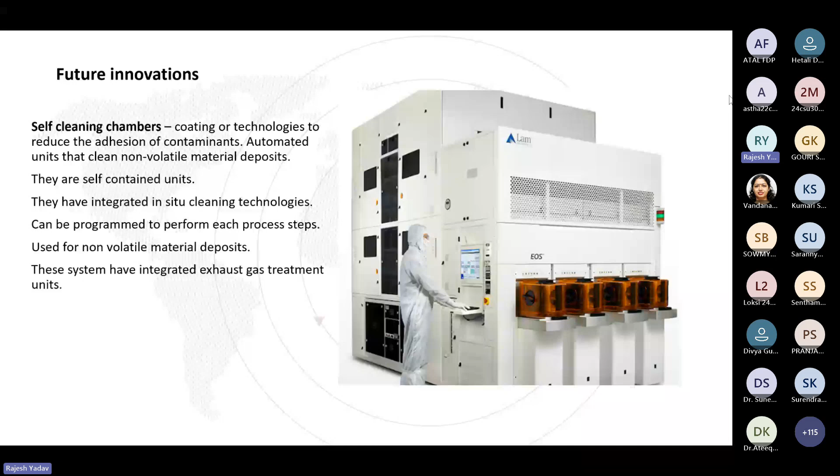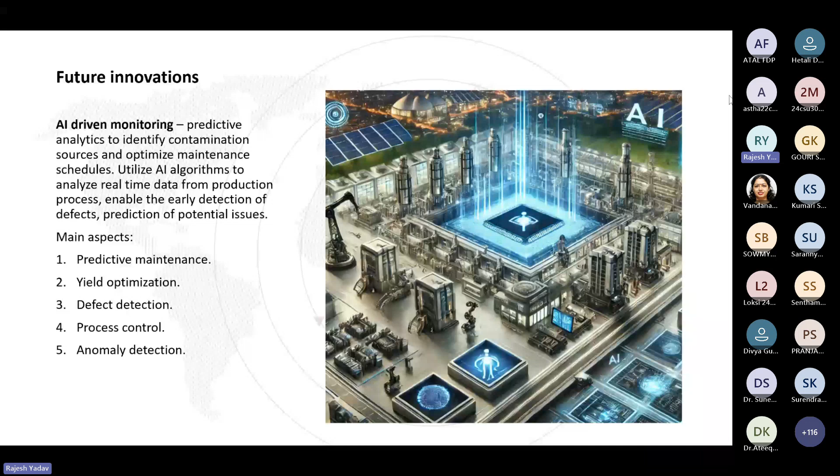AI-driven monitoring uses predictive analytics to identify contamination sources and optimize maintenance schedules. It utilizes AI algorithms to analyze real-time data from the production process, enabling early detection of defects and prediction of potential issues. The main aspects are predictive maintenance, yield optimization, defect detection, process control, and anomaly detection.

Green solutions for future innovation include development of eco-friendly cleaning agents and low energy bakeout systems, transition to renewable energy, optimizing water usage by recycling, using advanced materials with lower environmental impact, smart manufacturing with AI to minimize waste, developing energy efficient chips, advanced cooling technology systems for sustainability, smart manufacturing with IoT, and green nanofabrication technologies.

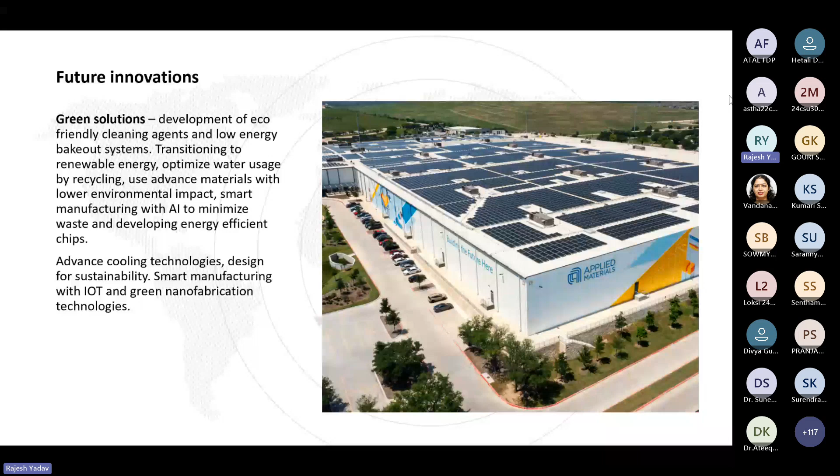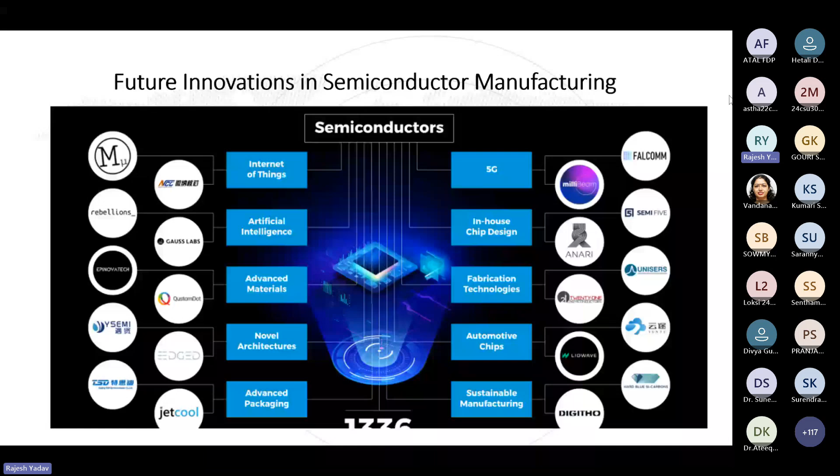These are some future innovations in semiconductor manufacturing. This has been already discussed in the previous sessions, so I will not go into the technicalities. That's it, this was my last slide. Thank you so much.